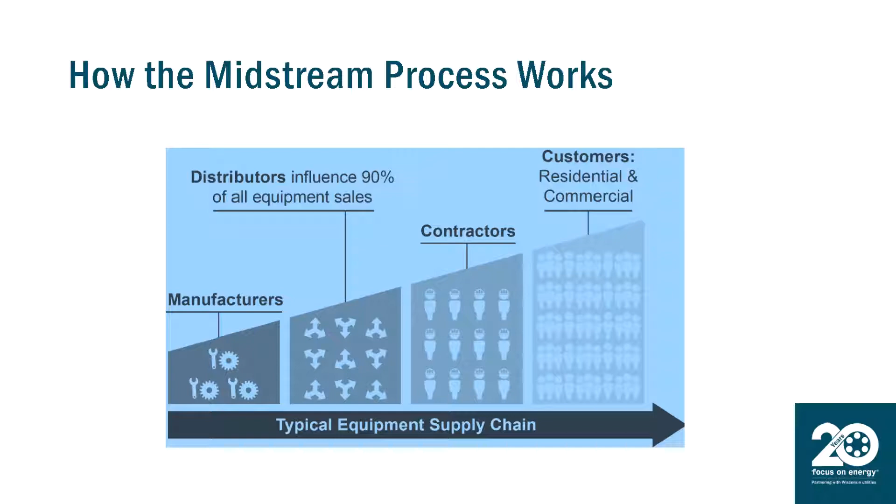In a midstream incentive program, the utility works with distributors and contractors in the middle of the supply chain. At Focus on Energy, the incentive is applied at the time the contractor sells the equipment to the end customer. Once the contractor submits a complete application, their distributor will then reimburse the contractor for the instant discount.

Midstream incentive programs have been used by utilities across the country for many years. And why? Because they're proven to work. Since the Focus on Energy midstream incentive is applied at the time of sale, the customer gets that incentive in the form of an instant discount. That makes it an effective sales tool to help you upsell more energy efficient equipment. A midstream incentive program can also help contractors, distributors, and Focus on Energy reach more customers when leveraging each other's networks.

As of now, the Focus on Energy midstream solution includes four equipment categories: one, commercial kitchen equipment; two, ductless mini-split heat pumps; three, heat pump water heaters; and four, high-performance circulator pumps. The equipment requirements in this training video are presented in that same order, so feel free to skip to the categories relevant to you and your business.

We offer incentives on several different types of commercial kitchen equipment, including dishwashers, fryers, griddles, hot food holding cabinets, ice machines, ovens, and steamers. All equipment types have to be ENERGY STAR certified in order to qualify for a discount. Those hot food holding cabinets need to have a volume of 13 cubic feet or more.

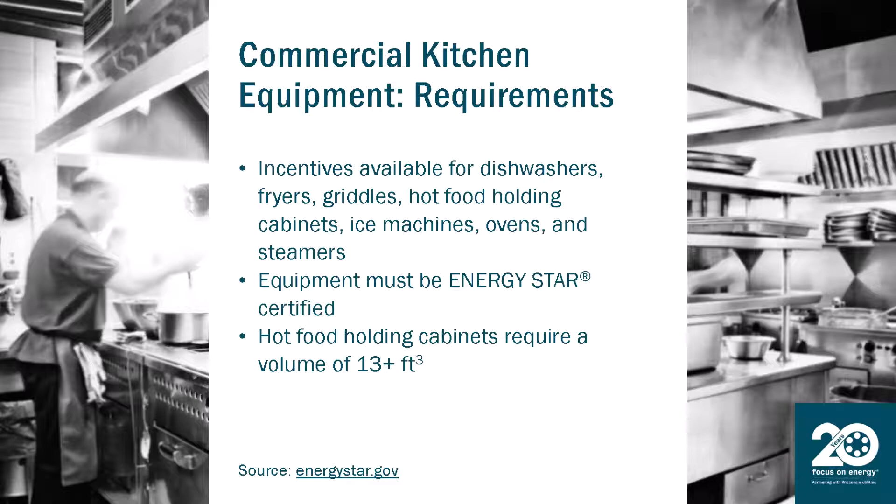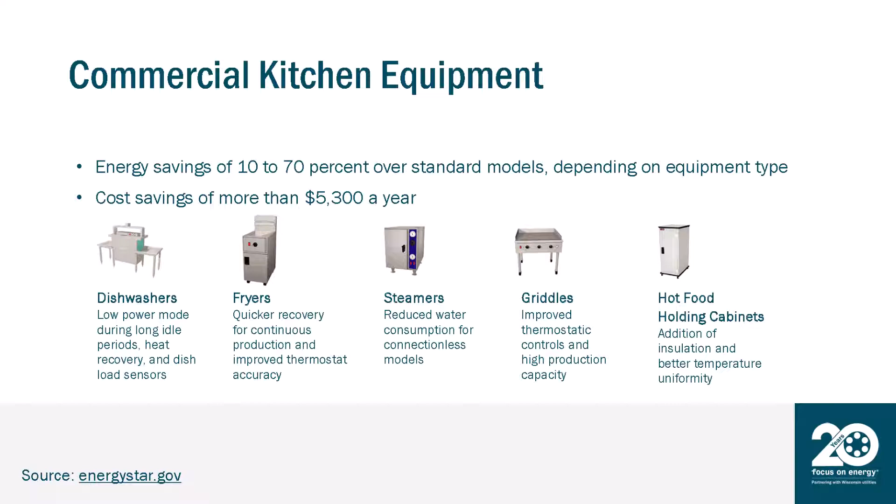There's a lot of benefits for customers who buy ENERGY STAR certified commercial equipment for their businesses. Because restaurants often use 5 to 7 times more energy per square foot than other commercial buildings, these energy savings are significant. Depending on the equipment, ENERGY STAR commercial kitchen products offer energy savings of 10% to 70% over standard models. Outfitting a commercial kitchen with ENERGY STAR certified products could save restaurant owners more than $5,300 a year on energy costs. Each product has its own unique and innovative features.

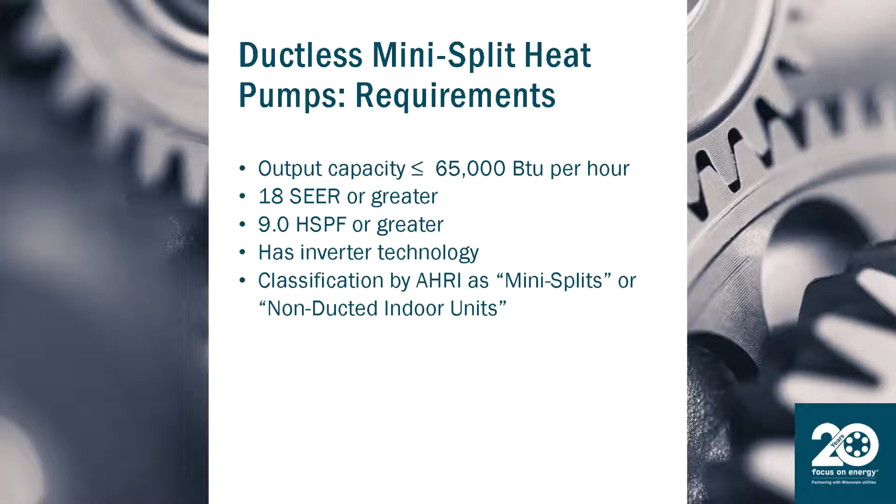Next up, ductless mini-split heat pump systems. Ductless mini-split heat pump incentives are distributed per qualifying system, or per outdoor condenser unit, since each system only has one outdoor condenser unit. To qualify for the incentive, the ductless mini-split system must have an output capacity equal to or less than 65,000 BTU per hour, be 18 SEER or greater and 9 HSPF or greater, have inverter technology, and be classified by AHRI as mini splits or non-ducted indoor units.

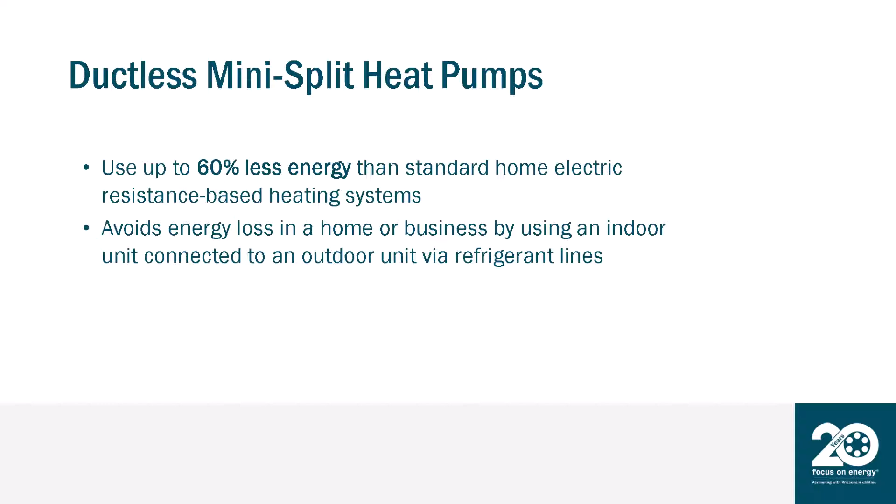There's a few key benefits of choosing a ductless mini split heat pump system over less efficient alternatives. First, because heat pumps transfer heat instead of generate heat, ductless mini-split heat pumps use up to 60% less energy than standard home electric resistance-based heating systems. Secondly, these systems use an indoor unit connected to an outdoor unit via refrigerant lines to avoid energy losses in a home or business. More than 30% of a central forced air system's energy consumption can be due to duct losses.

And now for the heat pump water heater measure. The requirements for this one are quite easy. All we require is that it's ENERGY STAR certified.

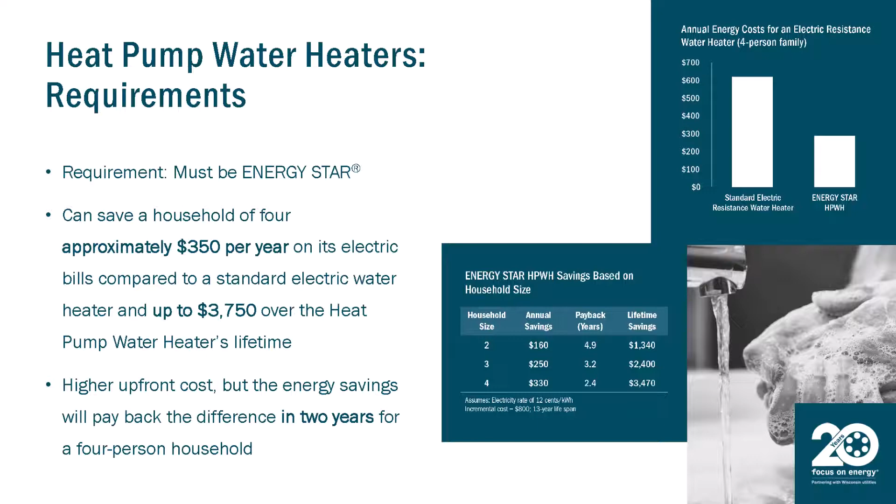Customers who install a heat pump water heater enjoy significant money and energy savings. Those who choose these units over a standard electric water heater can save a household of 4 around $350 per year on electric bills and up to $3,750 over the heat pump water heater's lifetime.

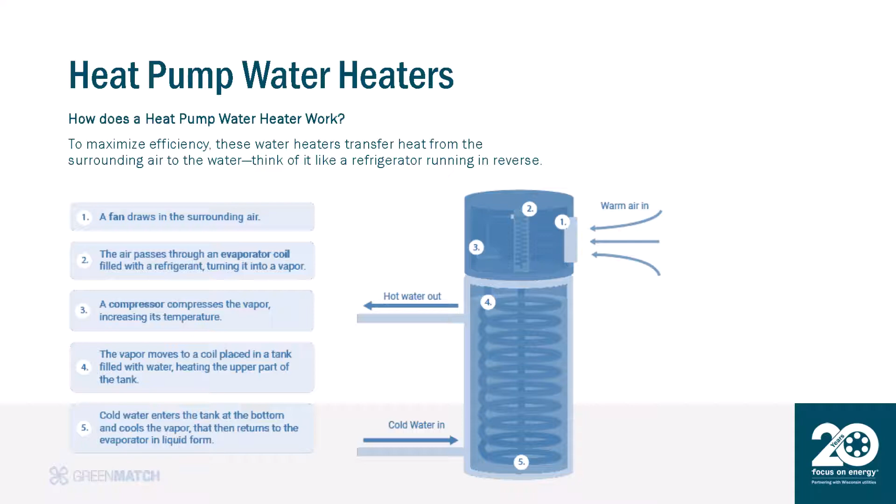The first question a lot of customers ask about heat pump water heaters is, how do they work? Here are the basics in 5 easy to remember steps. One, a fan draws in the surrounding air. Two, that air passes through an evaporator coil filled with refrigerant, turning the refrigerant into vapor. Three, a compressor compresses the vapor, which increases its temperature. Four, the vapor moves to a coil placed in a tank filled with water, heating the water in the upper part of the tank before it flows out of the unit. Five, as the hot water leaves the top of the tank, cold water enters at the bottom and cools the vapor, which then returns to the evaporator.

A qualifying circulator pump is a properly sized, high-efficiency, electronically commutated motor pump for heating or cooling circulation with variable speed capabilities to match demand. These are also known as ECM pumps.

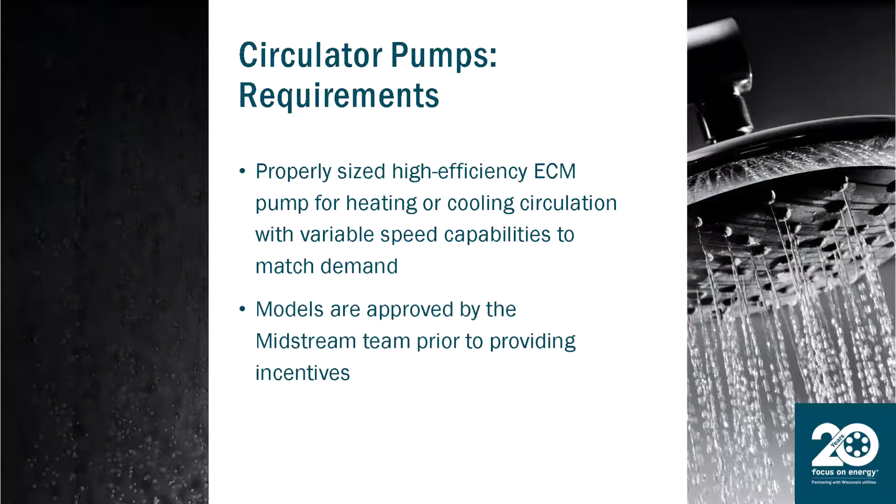Since there's no certification like Energy Star that we can use to determine which models meet this requirement, we created a list of qualified products. This list is ever changing, and you're welcome to let us know if there are other models you think qualify. The list will be sent to you when you enroll in the Focus on Energy program and is available for download in the Midstream application portal, which we'll discuss later in the training.

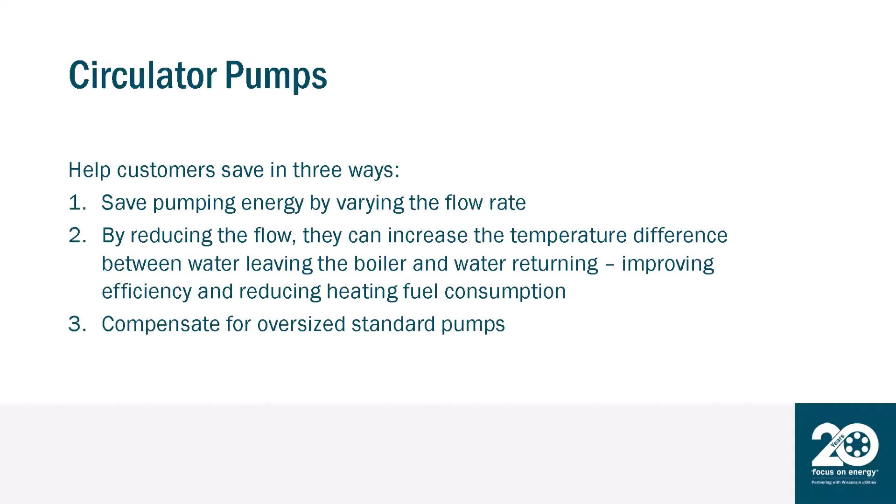By choosing a high-performance ECM circulator pump over less efficient single-speed alternatives, customers save energy in three basic ways. First, by varying the flow rate of the pump. Second, by reducing the flow, ECM pumps can increase the temperature difference between water leaving the boiler and water returning, improving efficiency and reducing heating fuel consumption. And third, by compensating for standard pumps, which are typically oversized.